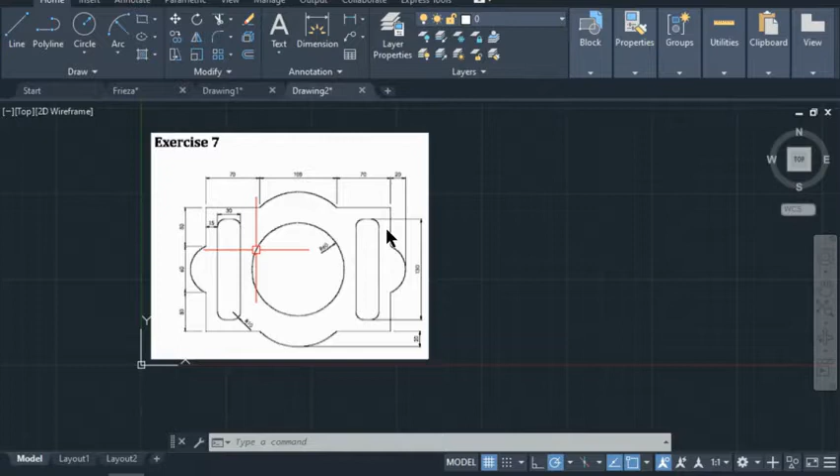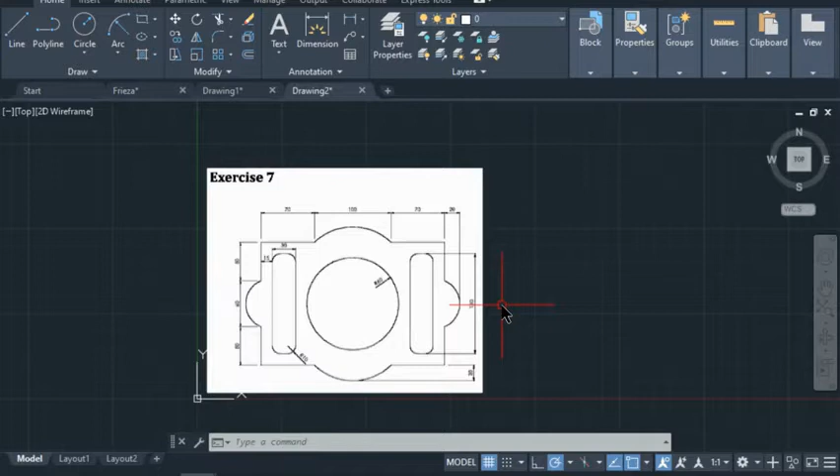If you look at this, there are some skills I already taught you guys to use. Number one, if you zoom into this corner, and if you recall, we already used this in exercise number 4, we use the fillet to round the corner. You see, if you draw a line up and down, the left and right is the same, so you can mirror it, or the up and down is the same. Matter of fact, if I cut this into 4 different corners, each corner is the exact same thing.

So you guys can see, if I only draw this little corner right here that you can see in the screen, that is all I have to draw. Then when I'm done drawing that, I can go ahead and mirror them into different locations.

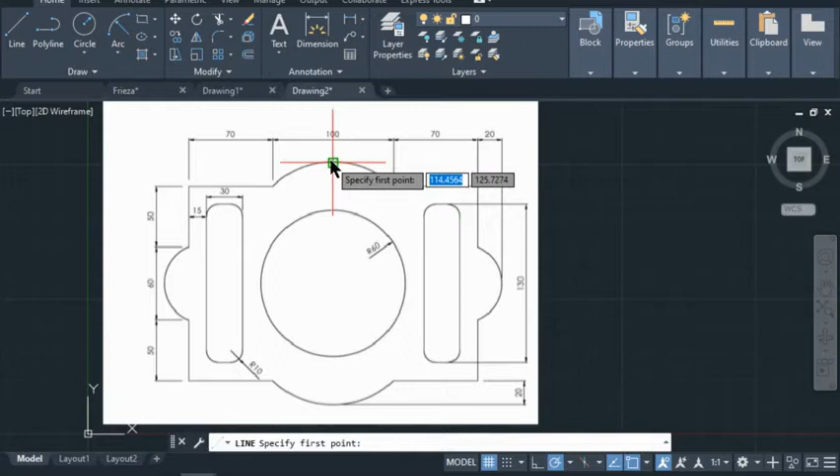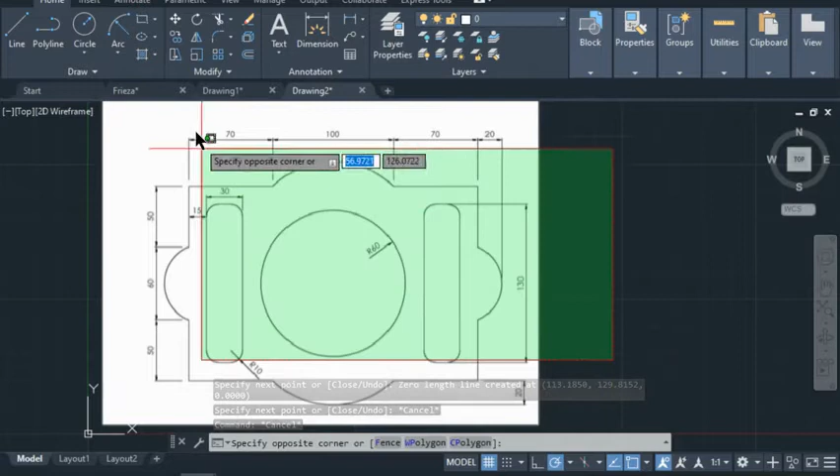I'm already in red, that's good. So basically, ladies and gentlemen, from here you're gonna draw some down, let's say somewhere there, and you're gonna draw some here. Then basically you're going to draw everything on this top section here, wherever my red thing is. So you're going to worry about that little section, draw those things inside that little box. Then when you're done with it, you're going to mirror it to the left, and then take the whole thing and mirror it back down. So that's basically how you do that problem.

All right, so let's go ahead and get rid of this, and we're going to start drawing. Let's take a look here. We're just going to go ahead and do just from here up, and then we're going to start drawing things.

All right, so first let's take a look. That's a 50, so we're going to draw this corner on the left. There's more dimension over here, notice there's 70 right here. From that point to the left, that's 70, and then down 50. Then there's a gap here because that's going to be for a curve. If you look closely, that's 60, so we're going to go down another 60, and then down 50.

So we're going to start with this one. Now all the dimensions here are the same, so that's 70, down here is also 70. Okay, I'm going to go ahead and do that right now.

Let's take a look, and also right here is 100. I mean, the center of that 100 would be what? Center of 100 would be 50. So it's going to be a line right here going down, that will be the center of the parts. All right, so I'm going to draw that center line first.

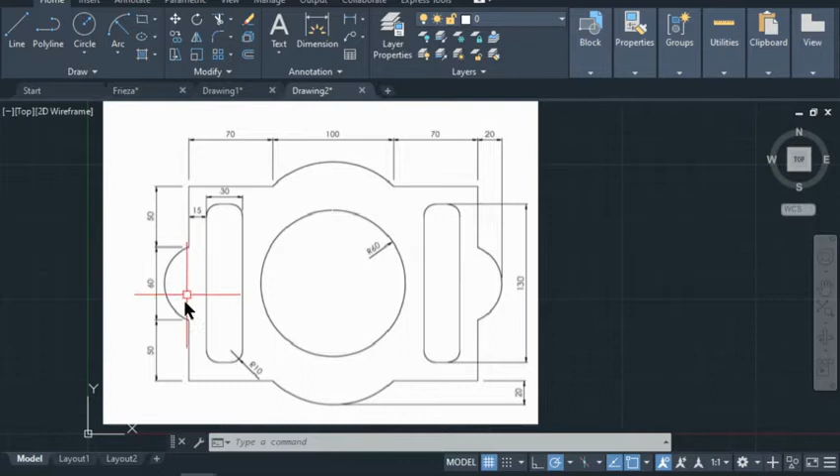And then from that center line to the left, that's going to be 50. And then we're going to start draw 70, 50, 60, 50, 70, and we close out with a 50. All right, so that is what we're going to do. I look like I have a line right there somewhere.

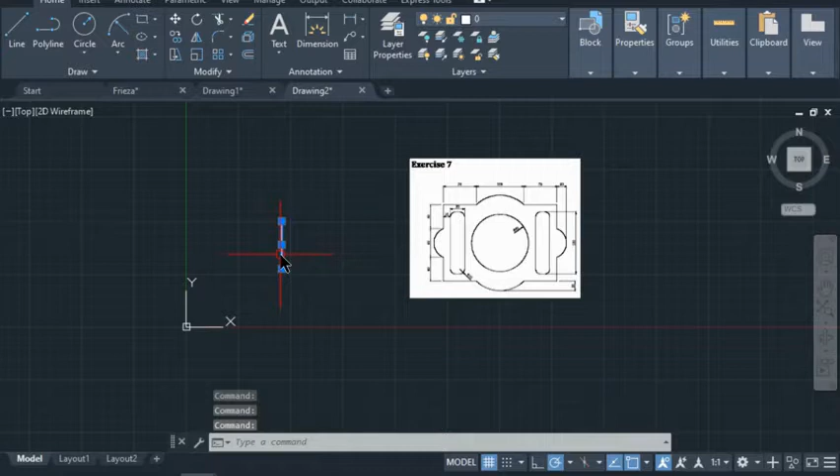All right, anyhow, let's go and draw this real quick, after we move that back here. So let's move this back over here, please. Okay, all right, so here we are.

Let's draw on that, I'm going to draw a line here. This line is going to be my center line, so it's good that it's already in red. I want that center line, and the measurements here. Let's take a look at the measurements right now. We did the math, that's 50, that's 60, that's 50, that's 160.

Right, so we're going to just worry about that 160 right there. So we're going to go in here, we do the measurements. Here's a new skill: if you want to change the dimension of what you already have, you do length, and you see lengthen. This one is for you to decrease or increase whatever you already have created. So I'm going to select this and hit enter.

Right now the dimension of that is 177. I want the length to be 160, so I'm going to do 160. I hit enter, and now it says select that object, and you can see down here when I put my mouse on the part, it gets smaller, it cut out that little part, right? I hit that, and I'm done.

Hit enter. All right, so this right now is 160. You can confirm that by looking there, right? Okay, new skill that you just learned.

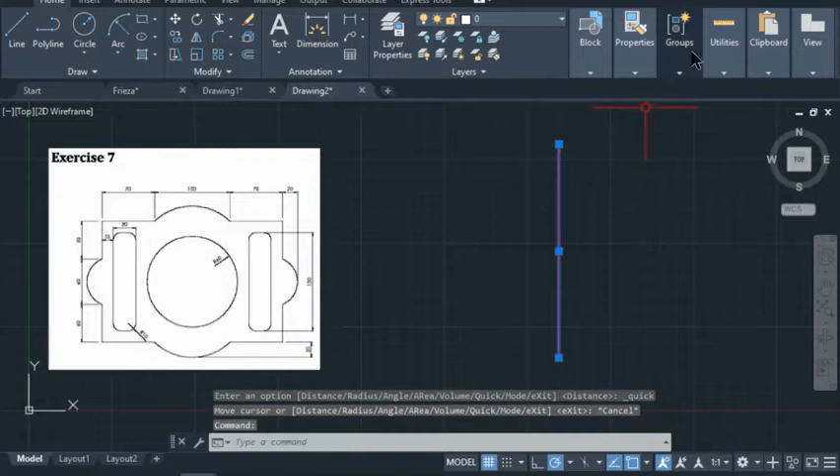Awesome, all right, I want this to be my center line, so it's going to be my construction line. So in your layers, in your property, change that to center. Now if you don't have that, you need to load that in. All right, there we are. From here, we're going to go ahead and draw it to the left, 50.

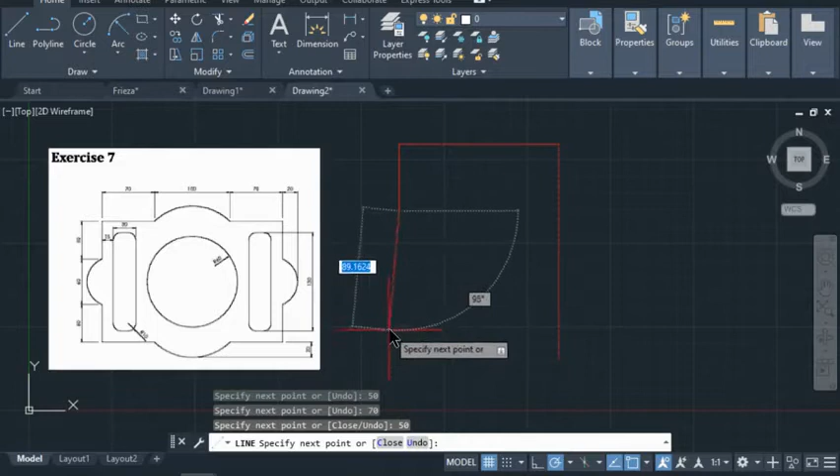Enter, and then we're going to do the 70. Enter, and then we'll go down 50, and then down another 60, down another 50, and then we go to the right 70, and then close that up.

So some of this line will be my construction line, and some of this will be my continuous line. For this right here, we're going to turn that into our construction line because that's not part of what we want right now. Same thing down here, that's going to be a construction line. Hit escape. And then also this is going to be a construction line. And then this will be, I'm going to change that to white because that is part of my drawing.

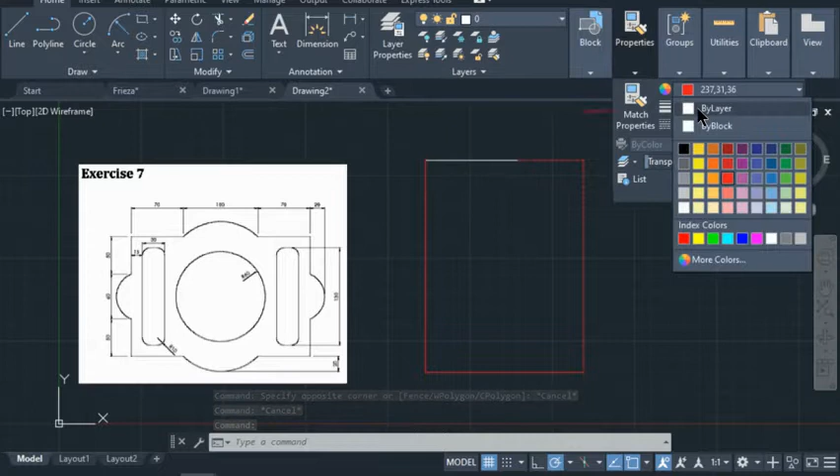Now I'll show you some skill here. You can see I have a construction line and I've got a white color continuous line. Instead of going and clicking on it and changing it all, there's one way you can do to change all of those. Just hit escape a few times to get out of things and do MA. When you do MA, the match prop is going to show up.

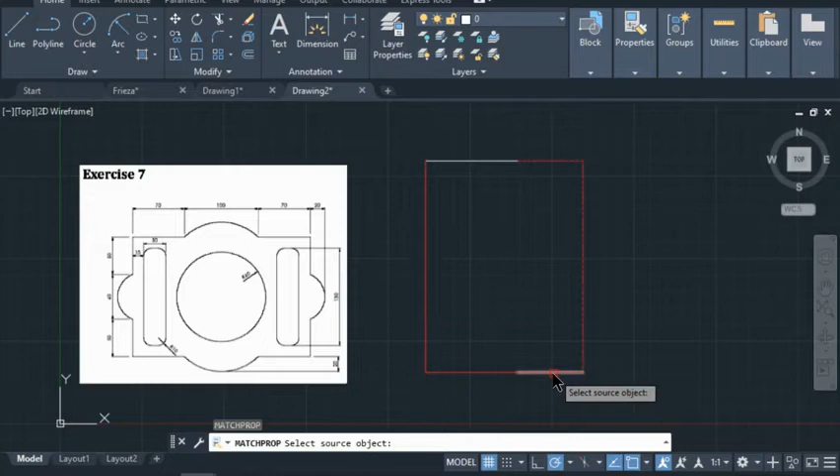Click on that. Let's say I want this line right here to be my construction line, as well as this one. So first, before I can turn this into a construction line, I need to go grab the construction line first. And then now I have that paint brush, I can select that and that. Now I can hit escape and you can see that it's turned into a construction line there.

Now let's do that again, MA, match prop, hit enter. I want everything to be this color now, so I'm going to go ahead and do that. I'm going to do MA again. This is my source that I'm going to select, everything's going to match that source, okay? So that's the skill that you just learned there, ladies and gentlemen.

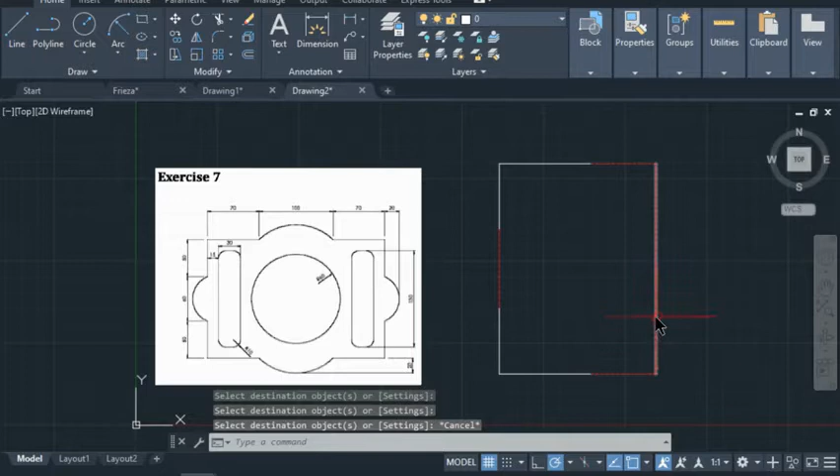Good job. All right, so now we have that little corner there and we can worry about the rest later. Let's go here and worry about this center here, that circle of radius 60, right? So let's go and draw that in the center of here. So let's draw a circle, all right?

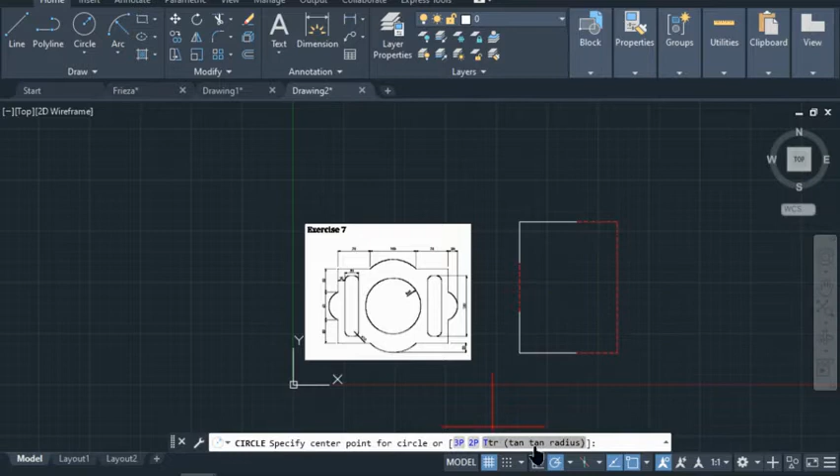And then we are in tangent radius, so let's take a look here. Center radius, that's what we want. All right, so we got that. We need to go to this line here, and then you see the triangle show up. That triangle is the center of this. So I'm going to click on that. We want this to be a radius of 60. Hit enter. And again, I want this to be matching the white color because that's part of my drawing.

So what do we do? Well first of all, we're going to go ahead and trim this section here because we don't want that at all. And we're going to trim more actually. We did not really have to draw the one in the bottom, so I'll show you. But first, let's go ahead and hit escape a couple times here. Do MA, I'm going to match this color to this one. Hit escape, now I'm done.

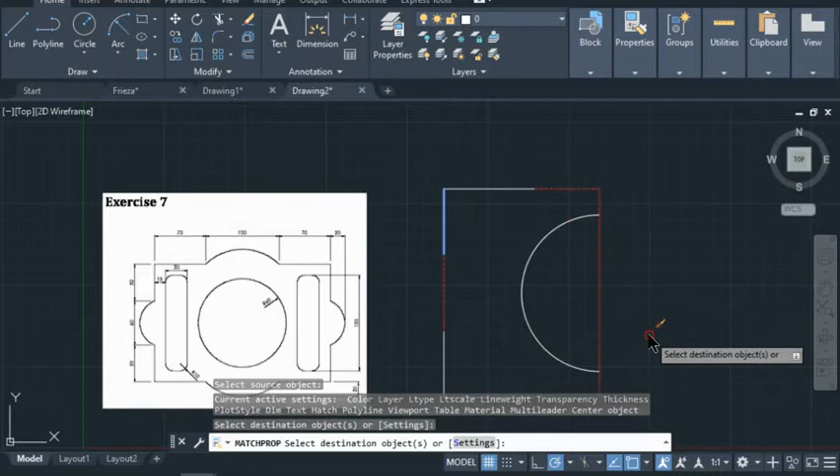All right, so we're going to go ahead and do something here. I'm going to draw a line from the center of this, all the way to the center of that on that end. I'm going to trim everything underneath it because I really don't have to draw this. Right, I just do that and then I only use this corner and then I rotate everything. So, good job.

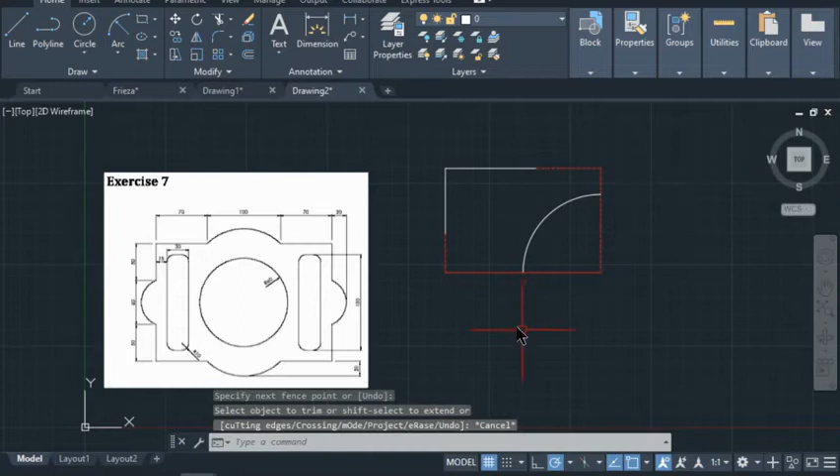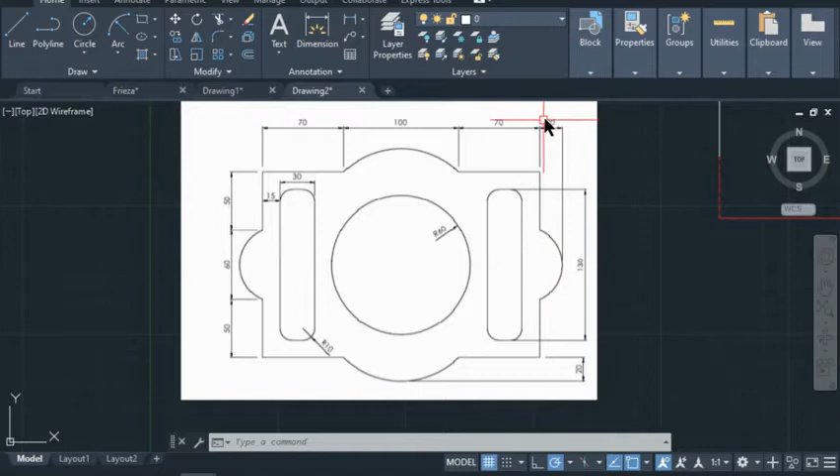I'm going to go ahead and worry about this arc right here. I'm going to draw the whole arc, but first I'm going to draw only that corner. So I'm going to draw this arc, from here to here, now it's 30. And that arc right there, from here out, there's a measurement that they said. That measurement is 20, right? See up here, from here to there is 20.

So we're going to go ahead and do this. We're going to click on offset, and we're going to offset this line. First hit offset and I'll give you a dimension. Now if you hit F12, you can hide that, and hit F12 again to show it up.

I want offset 20, hit enter. Now I can select the offset that I want right there. Okay, so that is what I need.

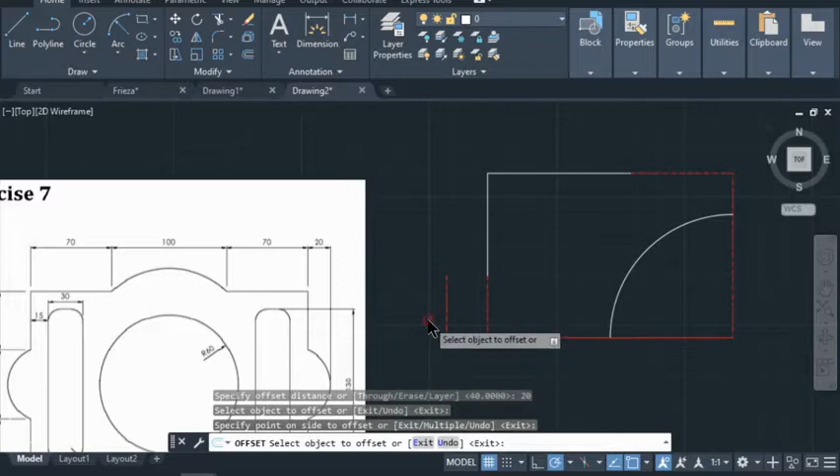I'm going to do the same thing for the one on top. If I zoom back into the picture here, I can see that that is also another 20. So I can go to the drawing and offset this one as well to 20, which I already have. Let's offset this up 20 units.

So we got that. Let's go to our start end radius arc. We're going to draw an arc, connecting from here to there.

And the radius of that, give me a second here. Now sometimes it opens like that, so what you're going to do is change the direction of it. You change the direction and it's going to open the other way. I think I selected the wrong one.

Give me a second, I'm going to start end radius. So we start on top, we go down. That's what we have, right? Now we need to measure and worry about the dimension here real quick. So from here up is 20, and from here to here was 50, right? So that is something we need to worry about.

So what kind of arc is this going to be, really? Let's see, one second. What if I do offset here? Let me offset this. Offset this arc. So first, how far?

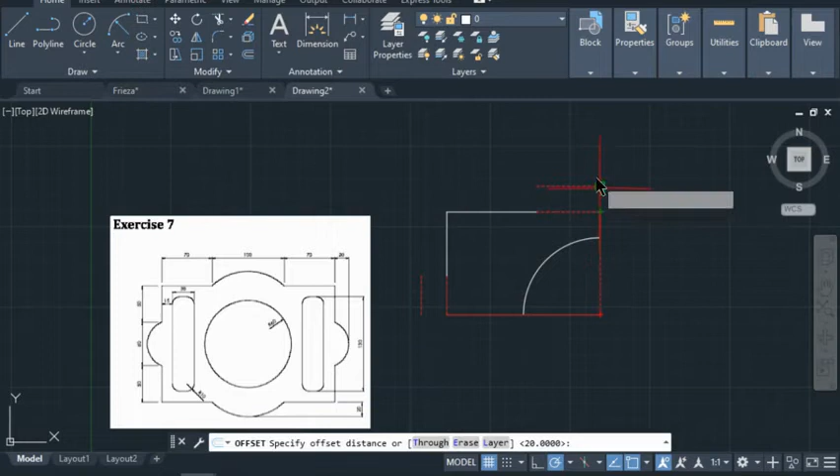From here to here is 20, and from here to here is also 20. You can quickly check that measurement real quick. What is that measurement from here to here? So you can see that this...

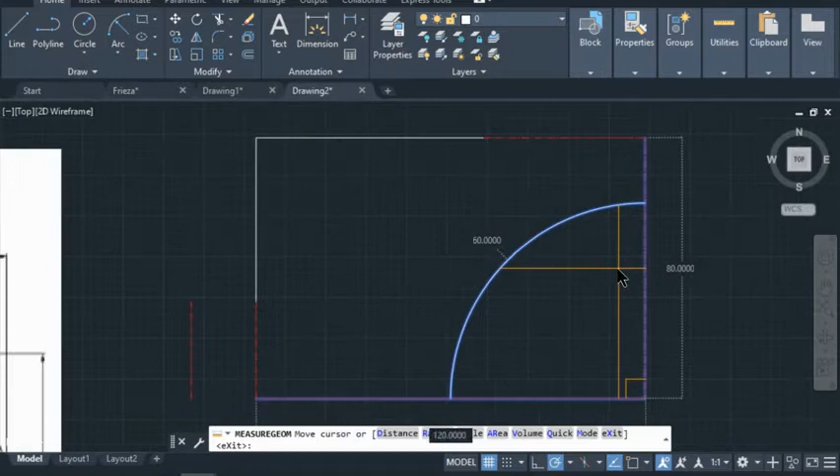You can see the 80 on the right hand side there. That is 80, but you know the radius of this circle is 60. So 80 minus 60 is 20, right? So from here up is 20 plus another 20, so that's 40.

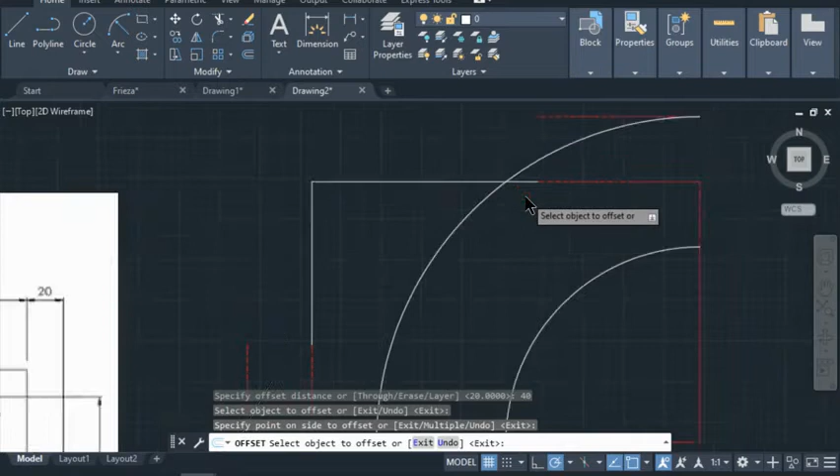So let's see if we can offset 40. Click here, put in 40, offset. We're going to offset this out to be 40. If we click that, that doesn't work because it's crossed over this line. So offset doesn't work, all right.

What we can do is click on this line, hit escape, click on this line, click on move to see if we can move this into this location. Nope, not going to work. So close that, we have to do it the other way, which is the arc.

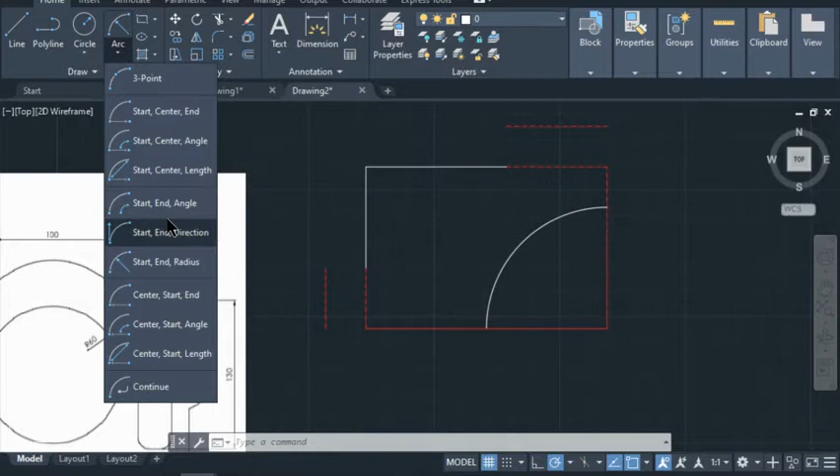Start end radius. Well, let me see if we're doing start end radius. Yeah, let's do start end radius. All right, if we start here, and actually we're supposed to end somewhere over here because that's going to give us an arc.

So let's do this real quick. Take this, this is 50 right now, you're going to make that 100. So remember how we do it? Lengthen, same thing, going to make that 100.

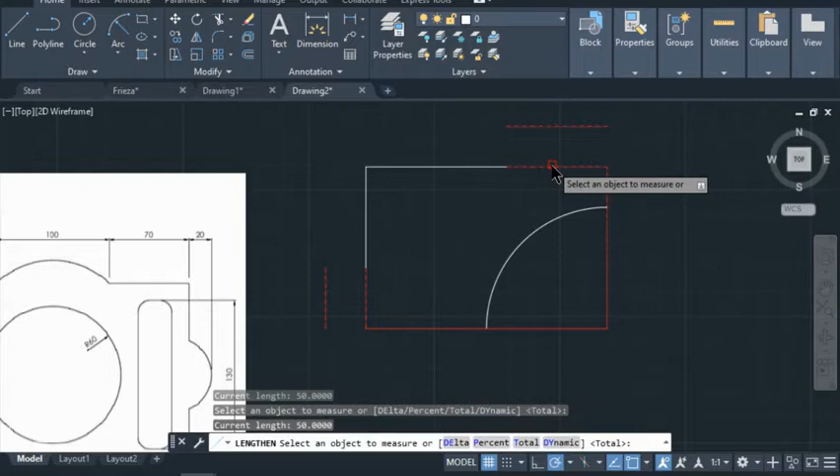What happened? Select an object to measure. Enter, 100, enter, select that object. It went the opposite way. I want it to go that way. Good. All right, so the reason for that is because now I can draw this arc.

Here we go, here we go. And then, all right, so it's open down. I'm going to hit escape, I'm going to do it again, I'm going to change the direction. Then that should be open up. Okay.

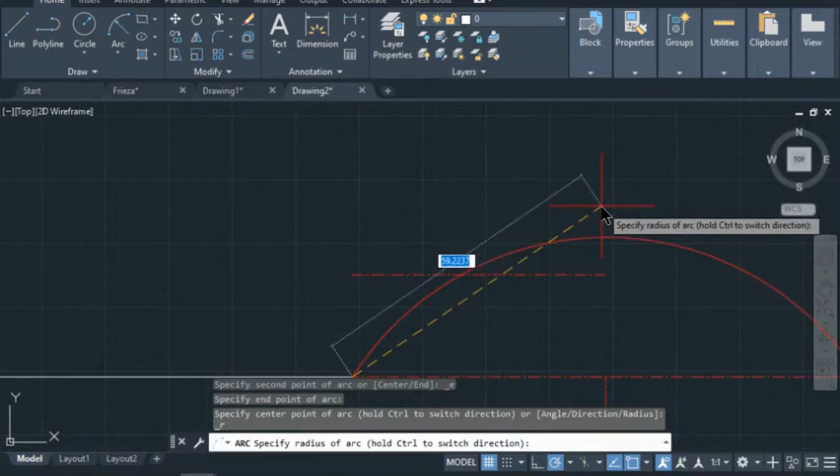So what we're going to do, let's zoom down a little bit, and we need to go into that location, and let's see what the location looks like. We have to get this location to intersect, so we need to click on this one. We drag it up there, so we know the point. All right.

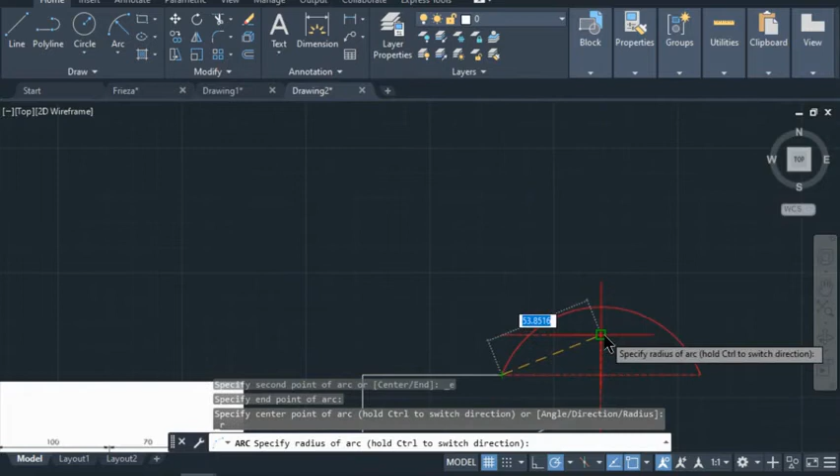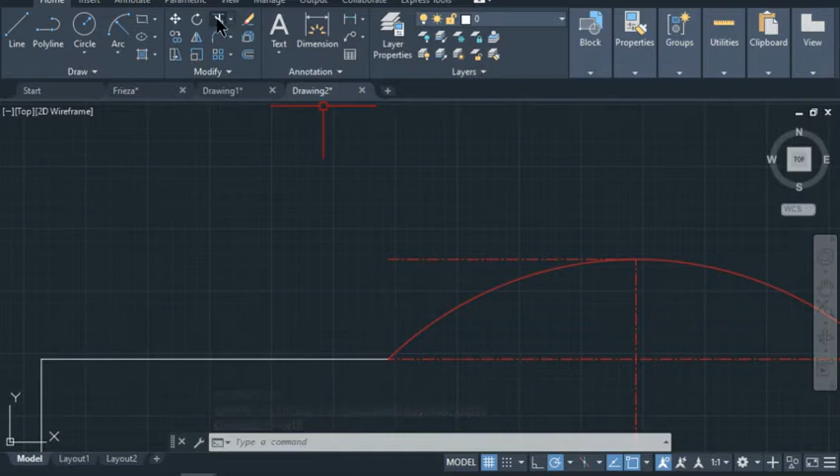This corner, that corner, and we need that intersection to show up there. All right, so that is what we need it to go for. So we might have to move that by clicking on it and dragging it up to that location. All right, so that, hit escape.

All right, so that is that, which means now we can go and trim the thing that we don't want. All right, we can now trim those. Okay, we can leave that here because we want to really see if we can measure that. That should be 20 from here up there, 20. So you can see it shows up 100 somewhere. That's 100. Earlier we know that the radius of that's 60.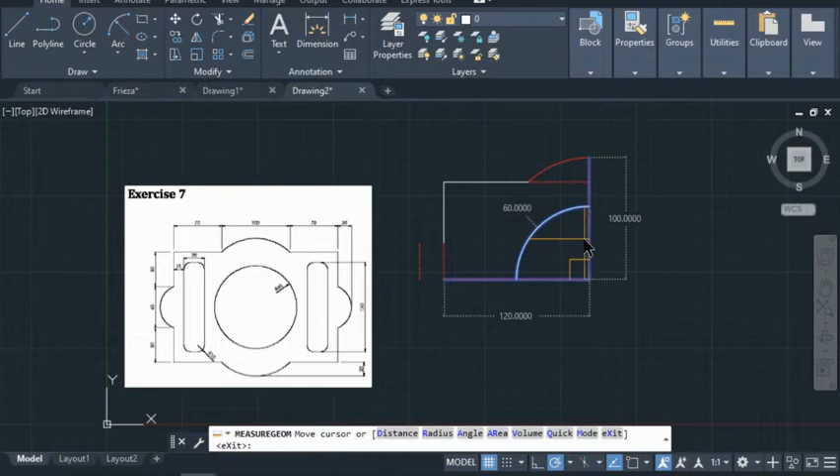So that's 60 and that's 100. All right, click Match Prop. Select here first and then select that to make it white.

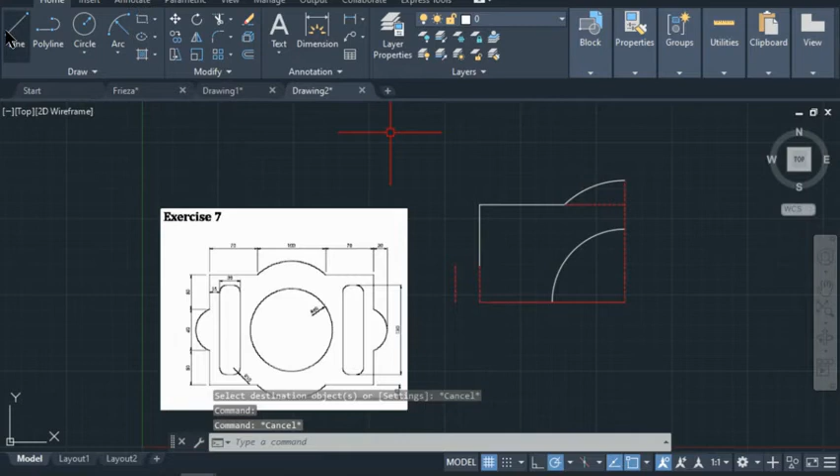Now, if you did not catch me doing this over here, let's do this again. So what I did was take this and double the length of that. There's two ways you can do it.

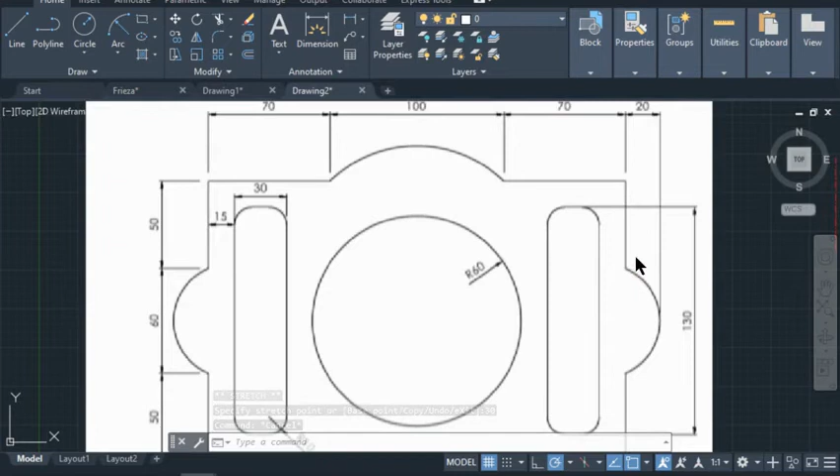Remember, this is 30, so you can either draw another 30, or I just make it longer by adding measurement into it. So right here it's 0. If I go down another 30 to put in 30, you have another 30 there. So 30 and 30 is 60, that's the gap right there.

That's 60. So you have that, and also I click on this line because I want this location here to intersect at that location. I need a point to show up. So I click that, I drag it out to that corner. Now I go to arc, and remember the arc we do is start, end, radius. So I start here, I'm going to end here, and move that way.

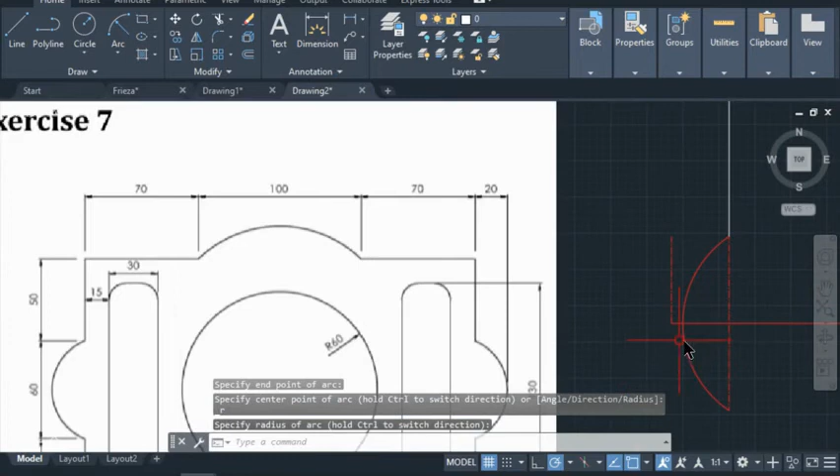Now I need to make sure it goes to that corner there, but it didn't. Sometimes it's like that. What you're going to do is click on it, zoom into that location, grab that point, and move it to that location. That's how you do that arc.

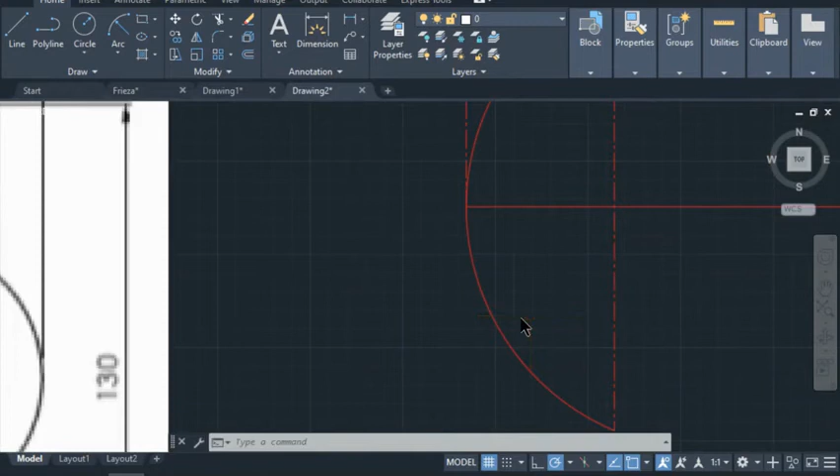Now, here we go. Let's finish this up, guys. So we have that right there. What we're going to do now is, like before, go back and trim the part that we don't want. Let me hit escape here real quick. It's trim, and then just trim that one.

And then we're going to escape, Match Prop this to white. Now we have the part that we need. The only thing we really need to worry about is this section here. We could either do it right now, or just finish it up later. So I chose to do that later.

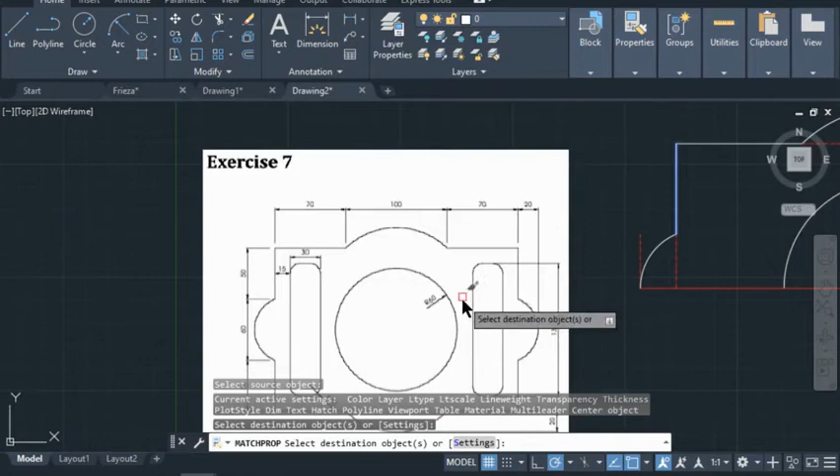So let's go ahead here. What we're going to do is mirror all this. Click mirror, and select all the objects that we want to mirror, this. Hit enter. We're going to mirror about this location. As you guys can see, I can mirror that from there to there. I don't want to delete anything, so we have that.

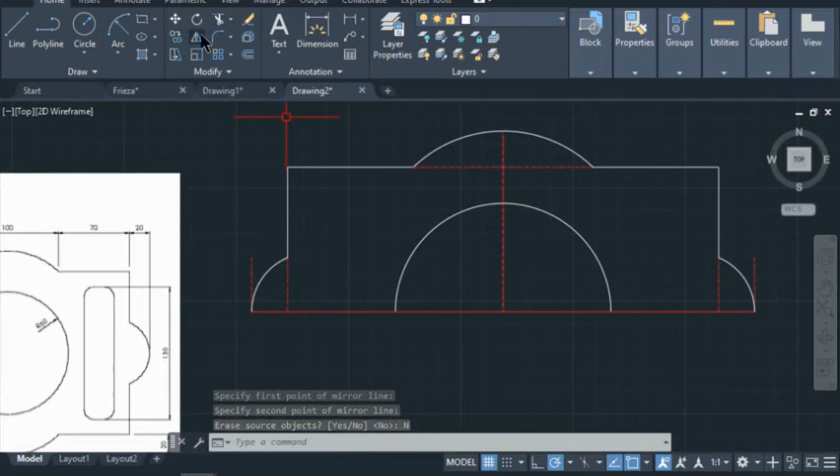And then we can do the mirror option one more time. This time I'm going to select the whole thing. Let me zoom out real quick. Now I hit enter, then mirror it about this point. You can see when I snap into that location there, I now have this whole picture, the outline of everything that you need.

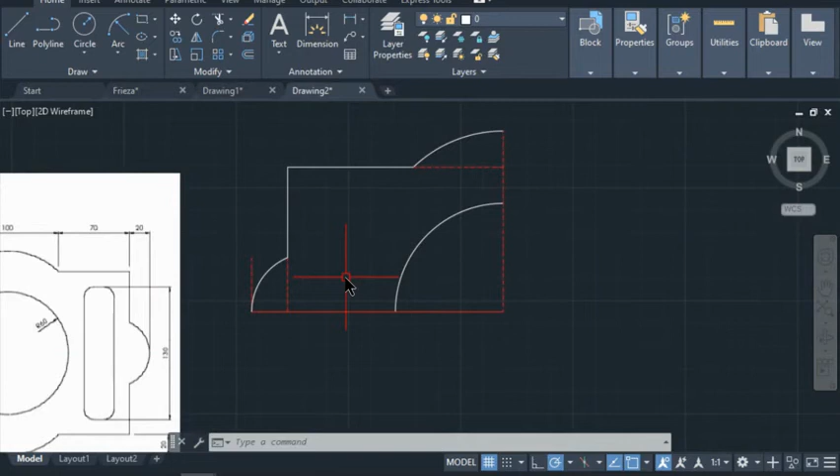So that's why we did the mirror options. Now, let's recall that if I go back everything this way, you can go ahead and draw that little rectangle there, and then mirror everything we've done. Or you can do what I just did and have everything here, then draw those rectangles and mirror the rectangle over later. So since we're already here, let's do that.

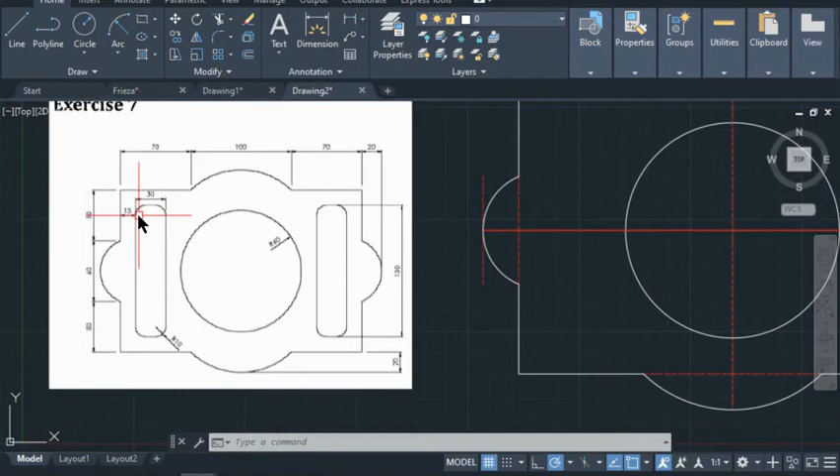So let's look at this rectangle. How far is this rectangle? This rectangle is 30 in width, and how long in length? Let's see, the length is 130. So you look at the picture on the right, you have the length. You look at the picture on the left, you have the width. And the corner, they rounded the corner of radius 10. So we're going to go ahead and do that.

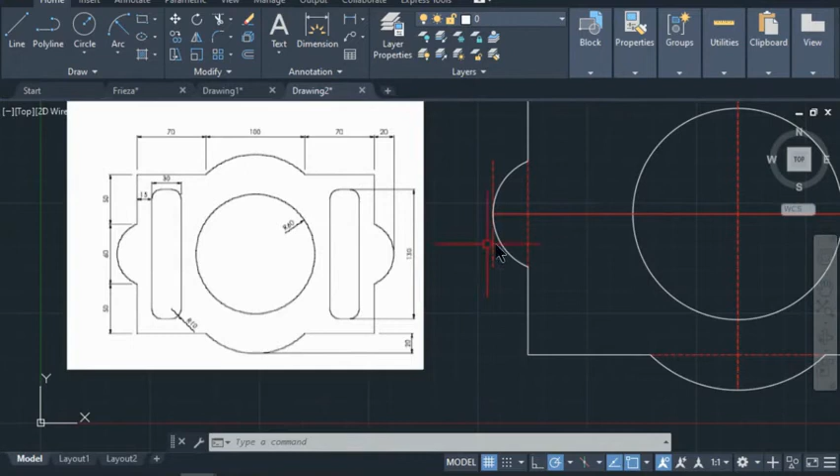So what we're going to do is draw that rectangle that we said we're going to draw. Let's draw a rectangle like that. And the measurement, the width right now needs to be 30. Tab, and then we're going to put 130 for the length. I'm going to hit enter.

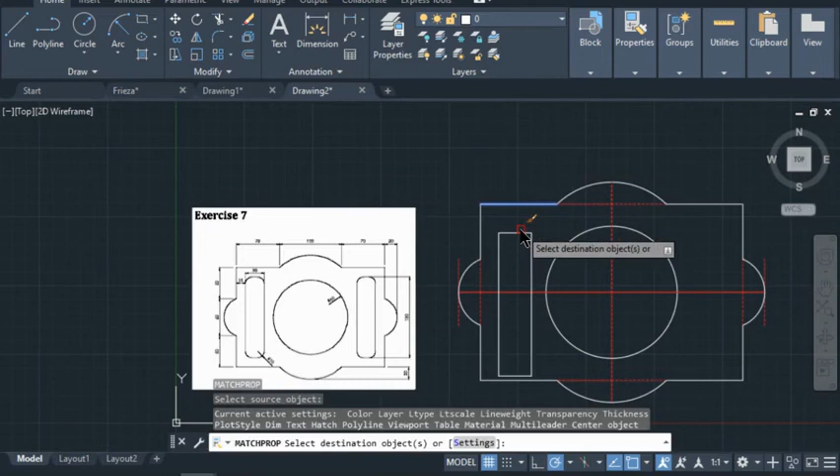Now we're going to go ahead right now and change that back to white. So we're going to do Match Prop, and then white to this. All right, so then we have that, but then we need to make sure of the distance. So this rectangle is 15 from the side here. So we're going to do that first. All right, so the distance is 15 from that.

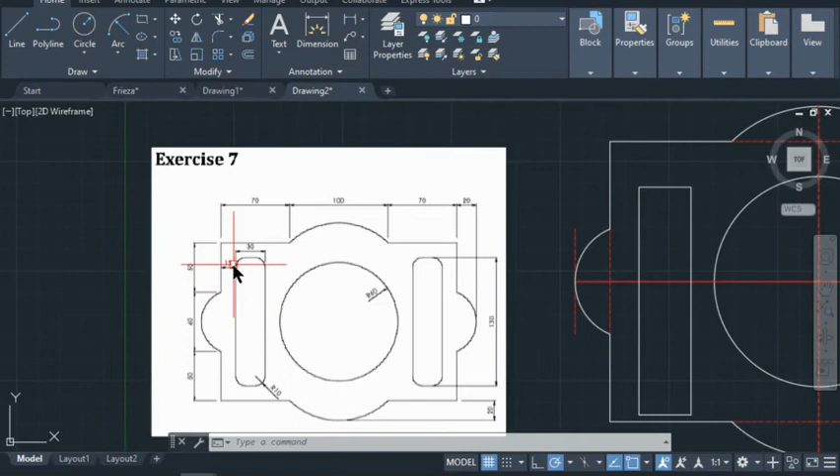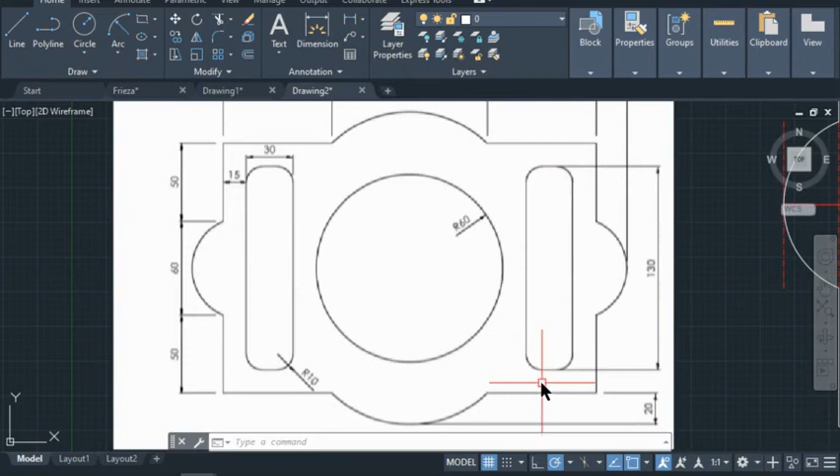So we're going to go and move it. Let's do another measurement here. It's 15 from the side, and it's also going to be 15 on the top. Now how so? Well, first of all, this is 130 for the length of it. If you look back at this measurement, 50 plus 60 plus 50, that is 160. 160 minus 130 gives you 30. So you have 15 on top and 15 on the bottom.

So we're going to move this into the location that we want. I'm just going to go ahead and do this real quick. Usually I do it another way, but whatever, this problem we can do it that way. So I'm going to do 15 to the right and then 15 down, right? So I'm going to draw a rectangle, or a square, that is 15 by 15.

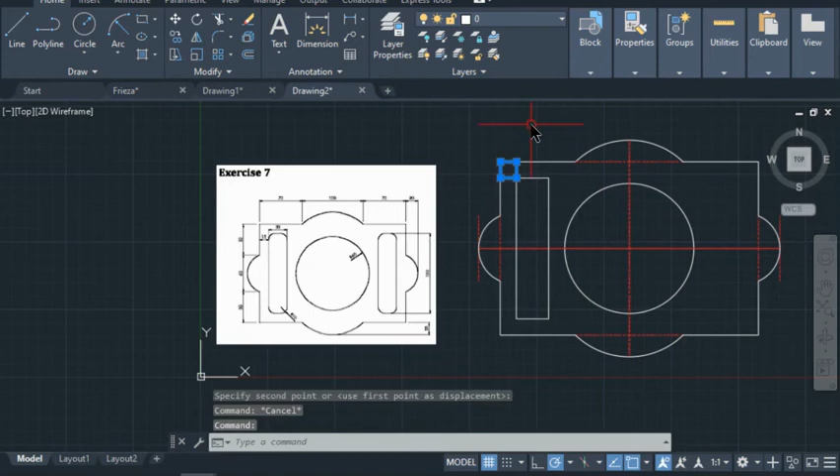Now that is the corner where I need this corner of the rectangle to be. So I'm going to click on move. I'm going to click on this object, hit enter, and click on this corner. I'm going to move that to that corner. Hit escape. And then I can hit on this rectangle and go ahead and hit delete. Now if you don't believe me, you can go ahead and do the measurement here to there.

That is 15, you can see that. And here to there on the left, that is also 15. We're going to worry about that later. So we have this, we're just going to go ahead and worry about the corner here. We do the fillet. We already talked about the measurement of 10 for the radius, so we're going to do that.

You're going to go ahead and do the fillet of 10. So here we're going to do 10, right? Select first object, select second object. We're going to do the radius. So let's click on radius first. Let's do the radius of 10. Enter, and then first and second.

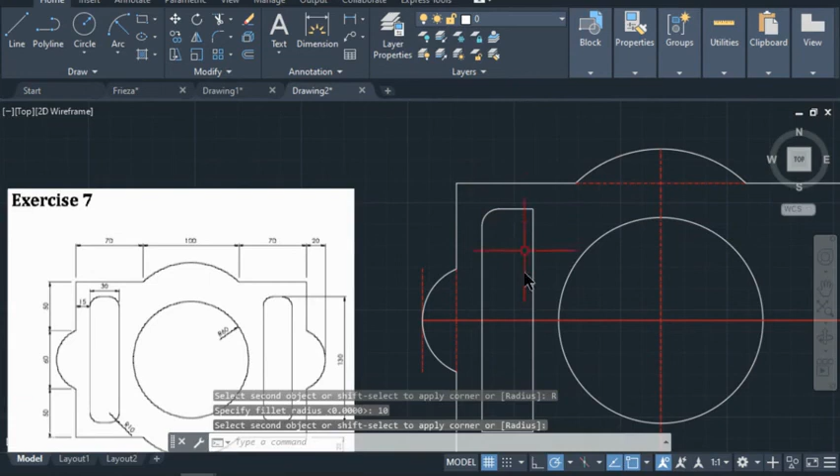Hit enter to repeat what we just did. And then we can go ahead and zoom down to the bottom, hit enter again to repeat what you just did. Enter. All right, so all of that is there. We got it. What we're going to do now is just mirror this whole thing.

Click on mirror, and then click this object, hit enter, and then we're going to mirror it about this center. So you can see we can rotate that down until we snap it in. Boom. So ladies and gentlemen, oops, let's do it again because I did not keep it. Select it, hit enter around this point here, snap it in, said no, I want to keep everything.

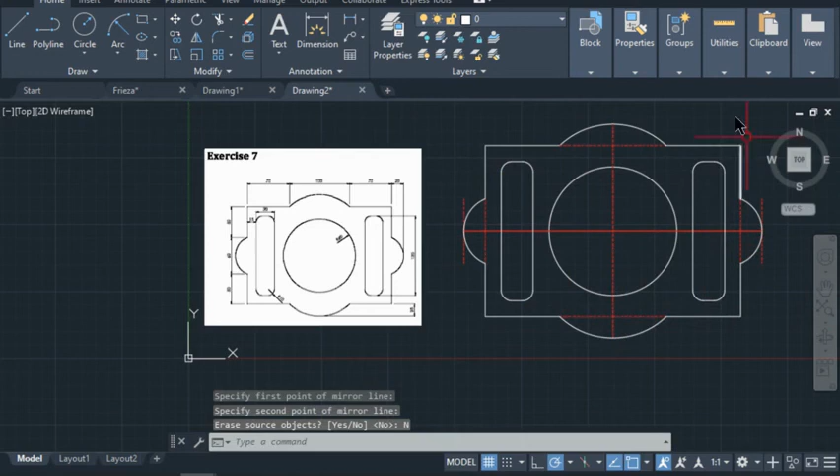So you're done with the problems, right? That is exercise number 7. What you're going to do now is, if you want to go in and delete all this construction line, you can, but that's up to you, and just do what you can with it.

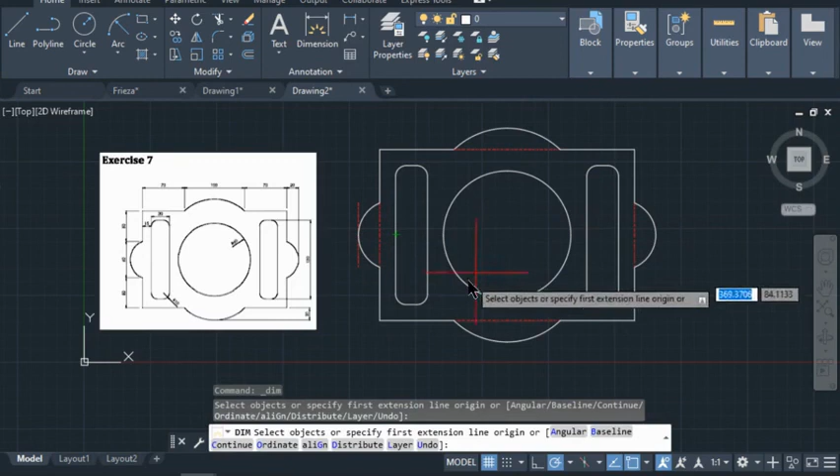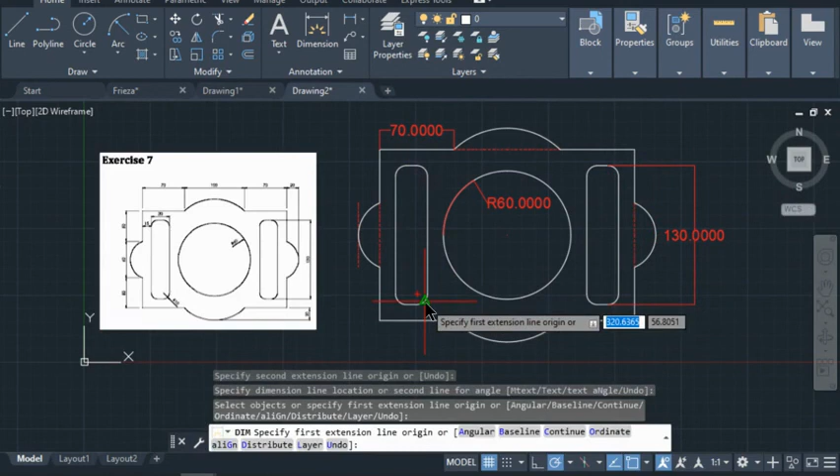Also going to go ahead and bring out all the dimensions that you need to bring out from this part of the drawing. For example, dimensions - we're going to go ahead and take out the dimension here. That's radius of 60 for that circle. And then you can do the 70 here for that one. You can do 130 from here to there. That is 130. The radius, let's zoom in so that it doesn't take the center.

The radius is 10. This one is 50. That top is also 50. And then the distance from here to here is 60. So you guys can see that I need all those measurements out. And the distance from here to here would be 100. Make sure that you show me those measurements. And the distance from here to that point is 20.

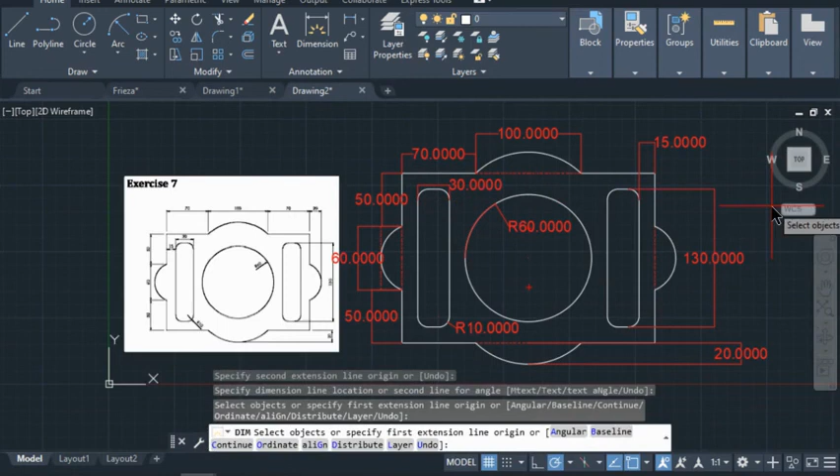So once you're done with it, then screenshot it. And one more dimension that we need to do, the 15. All right, so that is 15. Is there any more that we missed? Yes, the distance from here to here is 30. All right, so those are the dimensions that we need for this picture. Screenshot it, put it on your Google slide deck, and you are done with this. Enjoy.